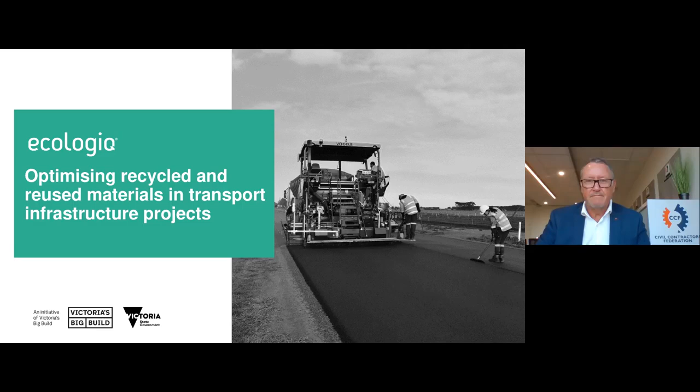The future of Victorian infrastructure is green. Recycling Victoria has laid out a 10-year roadmap to a circular economy, a future where our state's public and private sectors will unite to prioritise sustainability. At the core of this are our public assets, the roads and railroads that connect us and ignite possibilities. But where does the change to green thinking begin?

The Recycled First policy. Recycled First will require transport infrastructure projects to optimise the use of Victorian recycled and reused materials. This will see the use of recycled aggregates, glass, plastic, timber, steel, ballast, crushed brick, crumb rubber and reclaimed asphalt pavement take precedence over virgin materials.

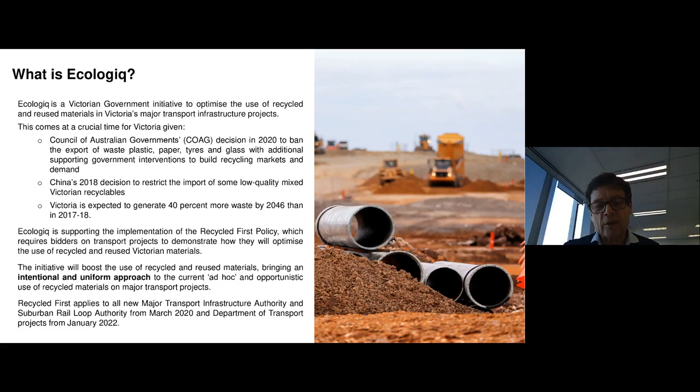So while the big build has started and got Recycled First requirements into its new contracts, the Department of Transport, who are obviously also a major client for many of you here, will apply the Recycled First policy from the 1st of January next year, and they'll start to roll it out into all of their world as well. So you'll see more and more of it as you go forward through the contracting world.

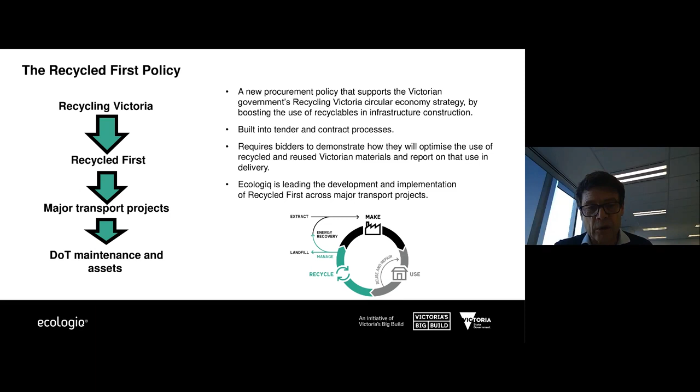Pretty simple approach when you look at your procurement and delivery obligation. At EOI phase, expression of interest, it's really a requirement to demonstrate your understanding of Recycled First principles and maybe some high-level stuff of what you might be able to do. Then during the tender phase, you'll be asked to develop a Recycled First plan, and I'll go through an example of that later in the presentation. And then in delivery, it's important to actually achieve against the plan, but you'll also be required to report against that plan.

Now, I'm not trying to make life difficult for anyone - we're trying to make this work for people. So we will really note how Ecologiq will work with you and with the project teams from Major Roads Projects Victoria and Major Transport Infrastructure Authority to make sure that that's feasible, practical, and works for all concerned.

So a little more about the tender phase, which is probably really critical for anyone who's a contractor or tenderer on any of our projects. There will be specific criteria which will assess how the contractor's Recycled First plan promotes the Recycled First policy. There'll be specific scope and requirements of the plan, and contractors will be required to complete and submit a Recycle First plan that'll include three things: an overview of the proposed approach, a specific recycle and reuse material commitment with a set of commitments against particular materials - we'll show you a table of that in a little while - and also some reporting obligations that go with that.

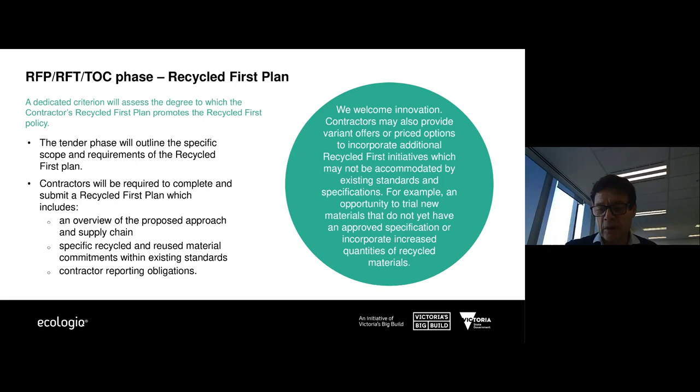There's a bit of a process that goes along with delivering a project. It starts at business case level. There's a pre-procurement level, a procurement stage where tenders are submitted, and the delivery phase. Ecologiq is working across all of those phases of a project, looking back at the business case to say what might be possible in terms of applying Recycled First principles and recycled materials into a project.

At the pre-procurement phase, we're doing some work directly to develop opportunities registers. In that space, we're looking at all of the materials required for a project and having a look at what is possible, what is an opportunity to use as a recycled material, what the specifications and standards actually allow us to do, and providing the guidance material.

So as a tenderer, you come to the tender with this provided to you, saying here is a list of opportunities - here's one we've baked before, if you like - and here's an opportunity for you to take and consider when you're putting your tenders forward. Then through that procurement phase, you will submit what you propose to do. That'll be workshopped and supported and finalised into a Recycled First plan that is then delivered through the project.

In practice, all projects released since March of last year have Recycled First policy requirements and the procurement practices built into them. There's more than 30 Victorian big build projects that currently have them, or will include them, in just the next 12 to 18 months. There'll be lots of opportunities to investigate things like recycled plastic fibre into non-structural concrete, plastic drainage pipes, reclaimed asphalt, plastic, glass, crushed concrete and brick in road pavements.

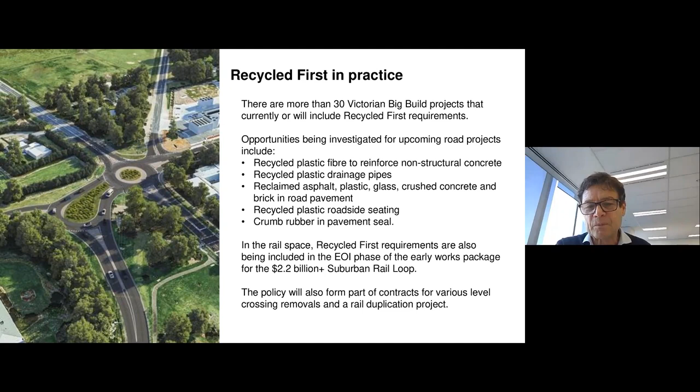This is a reference guide that has taken all of the DOT or Vic Roads standards and specifications and the Australian standards, and filtered them by recycled content, so that you can take a material application and get guidance directly as to what's permissible as a recycled alternative or a recycled percentage of material that can be incorporated into that particular application.

That reference guide is available on our knowledge share site, the Ecologiq knowledge share site. It's an interactive tool, so you can click through the document you see a snapshot of there, and it will take you through to the specific requirements or allowances, right through to the specification or standard that relates to it.

The aim here is that throughout standards and specifications, if you pick any of them up and read through them, at some point you'll find dotted through it an opportunity to use recycled material in one specification. Then you'll move to another one—say you go from pavements to asphalt. Each one will have references scattered through them on recycled opportunities.

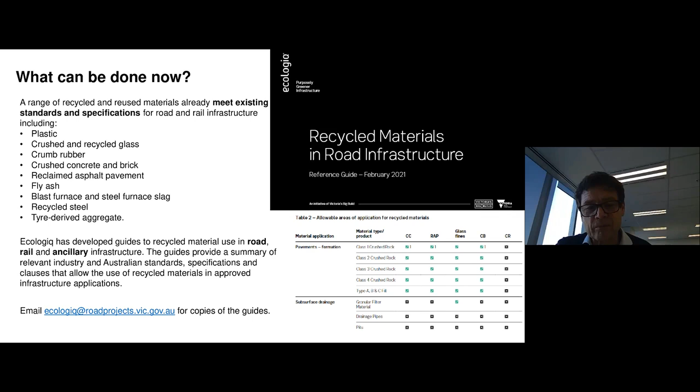Okay, so that's sort of how to go about it, I guess. And you may have some questions—we'll get to them at some point, at the end of the presentation.

I thought what I might do now is just give you an example of what we think is a well-prepared Recycled First plan. I do need to give a shout out to Fulton Hogan—I know some people heard that I once worked for them, but that's no reason for us using them. They've just presented one on one of our most recent projects, and we're pretty happy with the way it came out. Fulton Hogan have kindly allowed us to present this here now. It's obviously their IP, so I ask you to respect that.

I'll talk you through the slides on the page here, and I know there were some Fulton Hogan people who registered to attend this session—if you're there, thank you very much, and I really appreciate the opportunity to give people a heads up as to what a plan might look like, what a good plan might look like.

So here we go—hopefully you can see this okay. The screen, we tested it, and it should be fine. I'll talk through the highlights anyway as we go through it. So here's Fulton Hogan with their particular plan on their project, Craigieburn Road, actually. A bit of an opening page there, which we won't worry about, a contents page, glossary of terms. Let's move on—a bit of an overview.

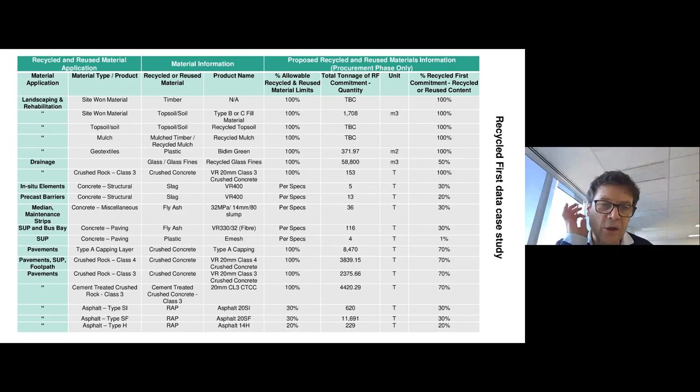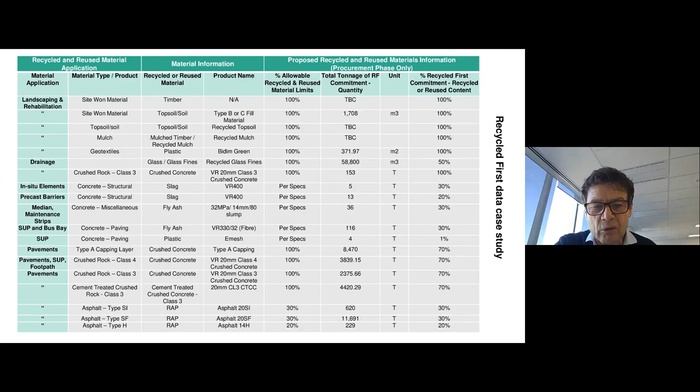This table is a simple example of what a recycled first commitment ends up looking like. Pretty straightforward - what is the application? What is the material application? Whether it's landscaping, drainage, precast barriers, maintenance strips, bus bays, shared user paths or pavements. The material type specified or expected to be used is mentioned. What is the recycled or reused material option amongst that - whether it's timber, topsoil, won on site which is a reuse opportunity, and people will always try to make the most of materials on site, so that's great. Whether it's recycled mulch, recycled plastic for geotextiles, glass fines in drainage bedding rather than natural sand, crushed concrete, slags, fly ashes, cement treated crushed concrete, and reclaimed asphalt, for example - these are types of materials that could be used as recycled content into virgin materials or as full-on replacements.

That's then put into the limits that are there, whether it's 100% replacement or 30 or 20% replacement, or in this case, what do the specs allow? They might vary depending on what the product is. And then a commitment - this is what the contractor says they will be able to do, what quantities they believe they'll be able to put forward as recycled content, and what that commitment looks like against the allowable specification component.

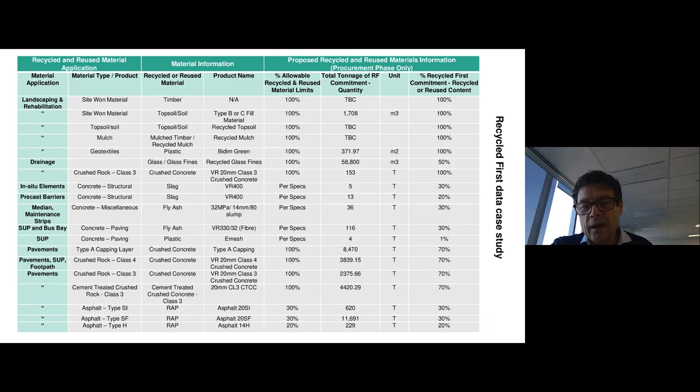This then becomes something to report against as we go along in a project, just like you do with all your other materials. Be well aware that you're cumulatively putting in crushed rock class 4 or whatever it is, and you're able to see that and track that as 100% or 70% or whatever recycled material use.

So that table is sort of the end result, if you like, and something to report against, and pretty simple to do so, we hope, but with a fair bit of work to actually ensure that those recycled content options are actually being applied.

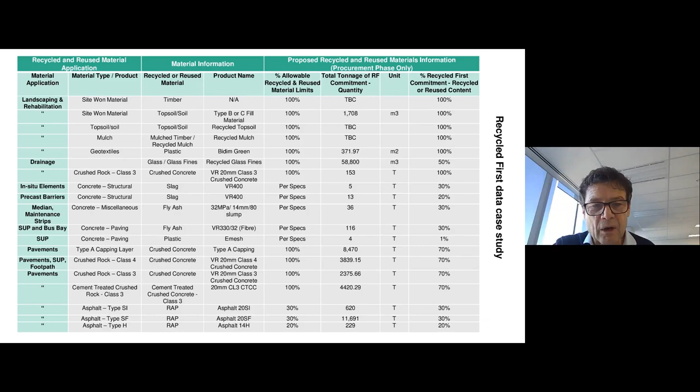All right, that's sort of the end of that's how you do it and why you do it and how you do it and who we are. I wanted to talk a little bit more about how we can help and a little bit of a showcase of what sort of things have been happening in industry so far.

So at Fulton Hogan, they've put together an entire plan and an entire program, and that will culminate in that sort of table. Where Ecologiq has sort of been in the game from the start, is talking about those various supply chain issues from the market supply through to the contractor, and then through to the government reporting and outcomes requirements and the basic success of the recycle first policy.

So our industry stream at Ecologiq really looks at the market and the people that can supply materials to us. It's about building the supply chain through resource sharing, through networking, and through identifying opportunities for trials and research funding support, which we're doing a bit of at the moment.

Some of the innovative things we've done - we just completed our first Shark Tank for Supplier. It was a great event, only held last week, where 4 suppliers came along with their innovations and pitched them to a series of experts. Anyone who's seen Shark Tank, we plagiarized that sort of concept and had them pitch this.

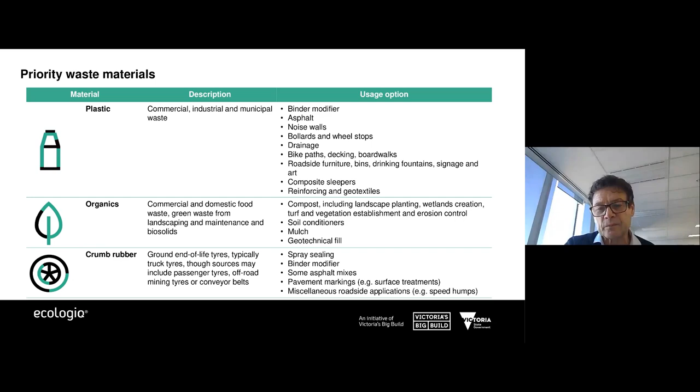So anyone involved in the 3 freeways in Melbourne - the M80, Mordialloc and Monash - used something like an extra 70,000 tonnes of reclaimed asphalt as a result of getting that 30% RAP approval through. I'm really chuffed that it's now in the specification, because that's the full cycle - it's now locked in as a business as usual approach to doing that type of work. I think that's really exciting.

A lot of people have heard about plastic bags and print cartridges in asphalt. There's been some work done on state government roads with that, and local government roads as well. Importantly, these things have to go from just being a nice idea that becomes a trial - where every council, every local government does 1 or 2 roads like that and gets a bit of publicity on it, and it's a good thing - to generating an ongoing, sustainable way of doing business. That really is the next step for us, I think.

And I mentioned recycled plastic sleepers - there's been some trials of that. Richmond Station's had them installed for some time, and that trial's now come to an end. There's a few other stations around Victoria, around the Melbourne metro area, that have got them in at the moment. They're also being trialled in Queensland on a main road freight line, and that trial's continuing. We're currently assessing opportunities to take it from a trial into actual practice on a couple of projects. When you think that Victoria's got 6 or 7 million timber sleepers still in its network that will need to be replaced, and we're certainly not going to replace them with hardwood timber again, recycled plastic might be a solution - maybe the solution - from a maintenance perspective, but also for new projects as they come along.

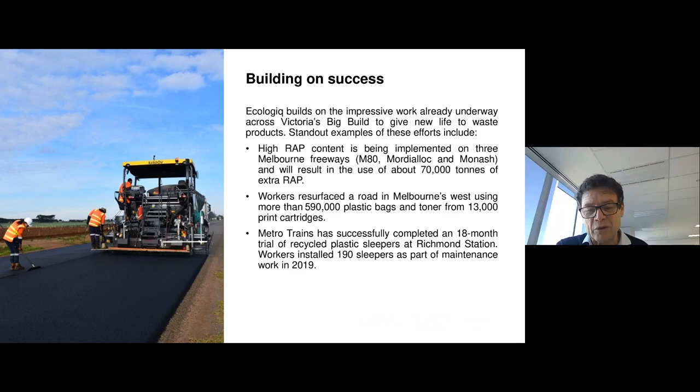And I mentioned noise walls before, and some of you may have seen the media opportunities around recycled plastic noise walls. We're so excited about the Mordialloc bypass freeway that converted what was a standard noise wall design into a recycled plastic design. It had 75% recycled plastic in it. Half of that plastic is the soft film plastic, the sort of cling wrap type stuff, which has been almost impossible to find recycled uses for. So really happy to have been able to do that and achieve some great outcomes.

Right now, work is being done to create a standard or specification that will allow recycled plastic to be used as a noise wall going forward. When you look at it, those noise walls are essentially a facade - their job is to bounce noise back off and protect noise from getting through. They also need to be rigid, they need to be able to stand up, and they need to be fire resistant, thermal resistant and UV resistant. So there's a specification currently in draft being built around this trial.

But it took a fair bit of goodwill and a fair bit of effort to actually get to that point. And I guess it reflects back when you go into your Recycle First plan - early engagement, early ideas - and then there was a huge amount of work to be done to break through the norms, the standards and specifications, and the expectations of people to actually get this approved and get this to actually happen.